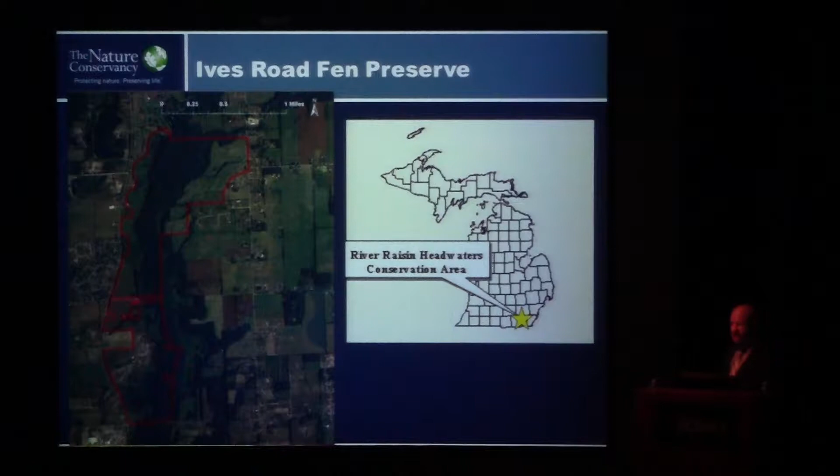You can see in this aerial photograph some of the threats in the surrounding landscape, including housing developments and agriculture. This green strip is really unique in this landscape because it's some of the remaining natural area. This particular preserve is about 700 acres in size, and about 100 acres of that is now prairie fen. I'll tell you how we got to restoring that prairie fen.

A little historical context about this property: in the 1940s there were major changes on the landscape that affected the disturbance regime—the disturbance processes that maintained the natural communities there. Those changes were fire suppression and altered hydrology. Prairie fens are fire-dependent habitats; they require regular fires for plant and animal survival and reproduction. Removing that drastically alters the nature of the ecosystem, and then there's also the altered hydrology.

A lot of this area was converted to agricultural use, and as a result, they put in ditches and drainage tiles to lower the water table, which drastically changed the communities. Those changes in the disturbance regime set the stage for the invasion of an invasive species called glossy buckthorn.

Are most of you familiar with the term invasive species? Okay, a lot of people nodding. So up in the corner here, you can see this is glossy buckthorn. It's a shrubby plant with very glossy, shiny leaves and these black berries, which birds love to eat and spread around the landscape. By the 1970s, what existed on this site is what we call a buckthorn monoculture, meaning vast expanses of the property were buckthorn and nothing else. There was no other species growing there, and I'll show you pictures of that, but it really diminishes the plant and animal diversity at the site.

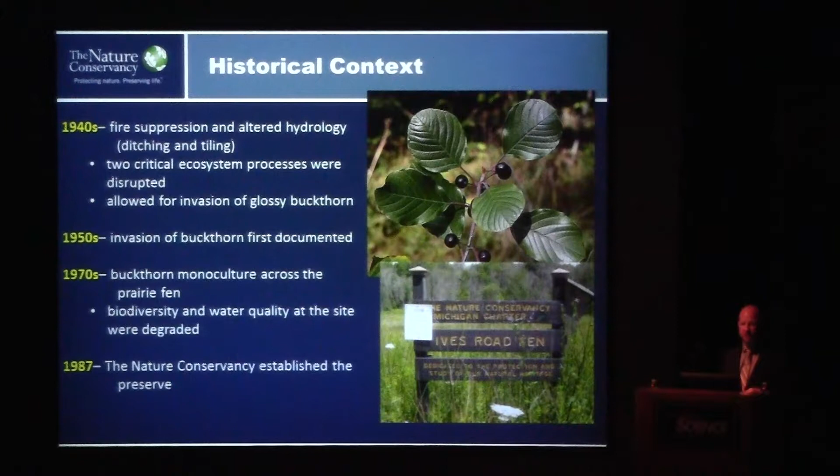Then in 1987, the Nature Conservancy purchased the property. You might ask, there's been all this abuse and degradation of the site—why would the Nature Conservancy buy this? The answer is that many of the native, rare and declining communities are in declining condition. There aren't any pristine fens left, so this was one of the best places left.

We saw the potential based on the plants and animals that sort of found some refuge in the few remaining pockets of fen. We saw the potential of the site, and that's why we decided to acquire it and start restoring the fen.

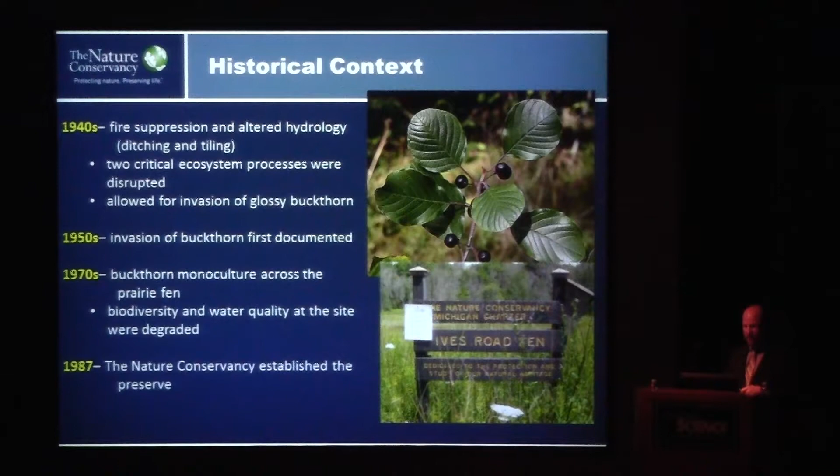For those of you who aren't familiar with invasive species, they're generally from another part of the country or another part of the world, introduced or finding their way to a new area by one means or another, much of the time by human activity. In the new environment, they don't have predators or competition from native plants familiar to their original area, so they tend to spread very fast, crowd out native species, and decline biodiversity. There's also about $120 billion a year spent on treating and monitoring invasive species around the U.S.

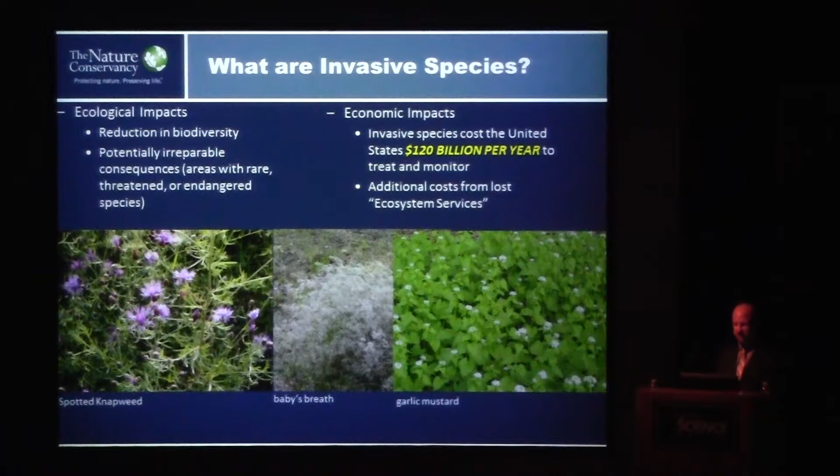Just to allay any concerns about using herbicides in the environment, the herbicides we use are wetland approved. They have very low impact on the environment and degrade very quickly, oftentimes just by being exposed to sunlight for a few hours, breaking down into very safe compounds. In addition, we're very judicious about applying them—we apply them to individual plants instead of spraying them over large areas.

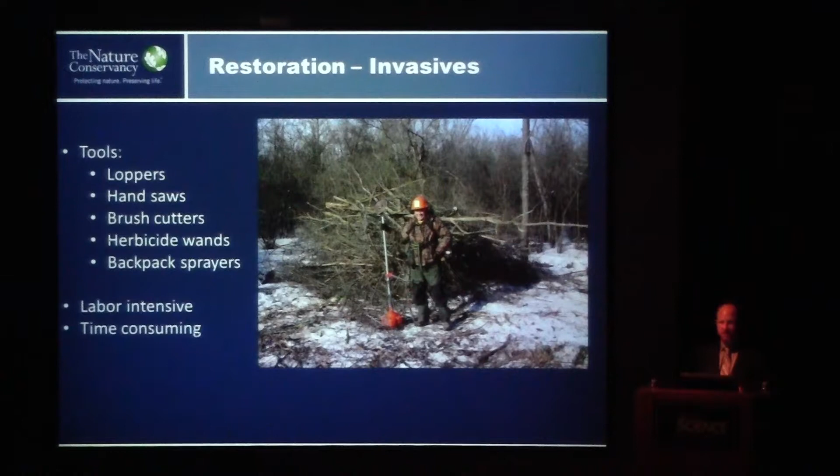I mentioned hydrologic restoration was the second technique we used. You can see in these diagrams how drainage tiles and ditches really change the hydrology of an area. Wetland plants like having their feet wet, having their roots in saturated soil. But putting in drainage tiles lowers the water table, which is great for agricultural crops but not good for native plant communities at all, especially wetland plant communities.

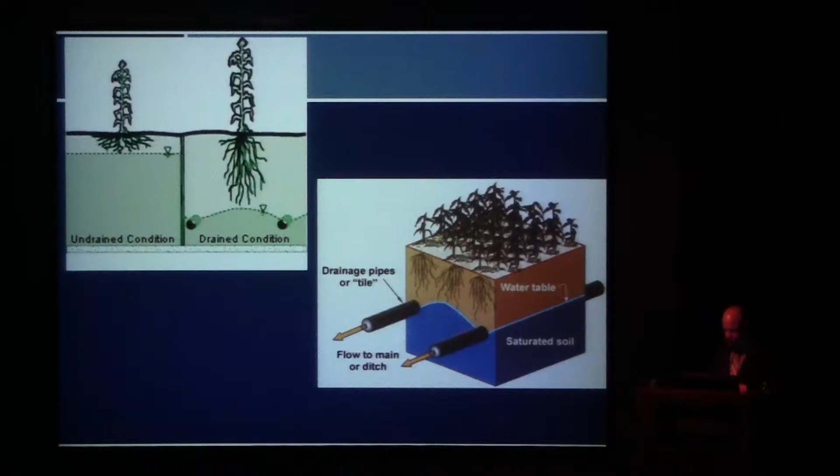So what we had to do is go through and remove these manually. In the 40s, drainage tiles were just short little sections of ceramic tubing, so we had to dig those out by hand. We couldn't use heavy equipment because the ground is too soft, especially when wet, and it would cause a lot of ground disturbance, so we had to do it all by hand.

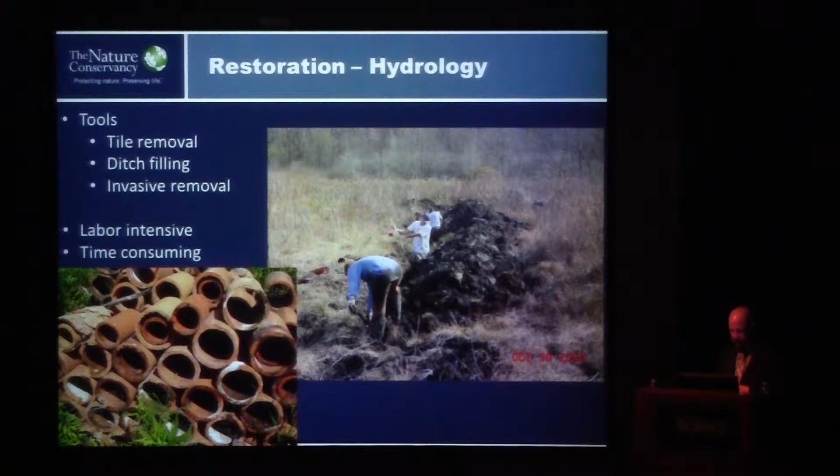When we removed these drainage tiles, we ran into a problem because we had these wide expanses of bare soil, and when it would rain or the water table came back up, it would start flowing down there and we'd get erosion problems. So we inserted tongue and groove board dams to break up the water flow and give the vegetation a chance to recover.

And then prescribed fire was a third technique we used. This is a fire-dependent community, and the plants and animals really depend on this disturbance process to be successful in survival and reproduction.

The seeds are just sitting in the seed bank waiting for the sun to get down to the ground level, heat them up, and provide the right conditions, and they spring right out. So we have a nice natural community. It saves us trouble—we don't have to buy seed and put it out there. They're really resilient communities if you just provide the right conditions for them. These plants just sprung back up in about 8 months or so.

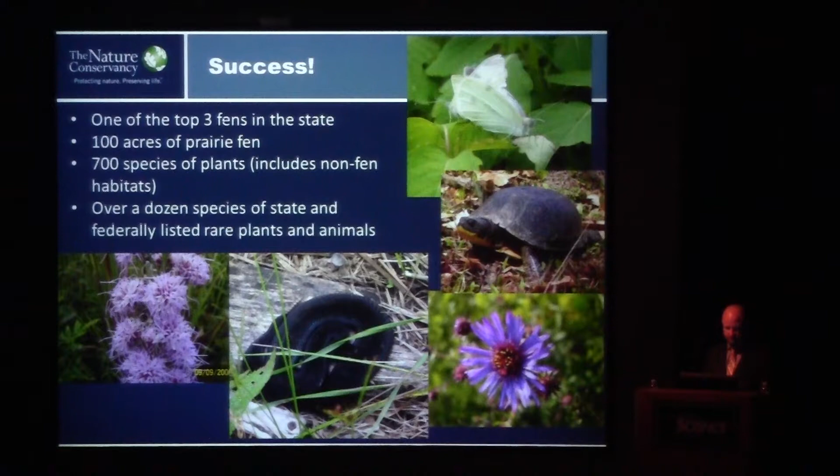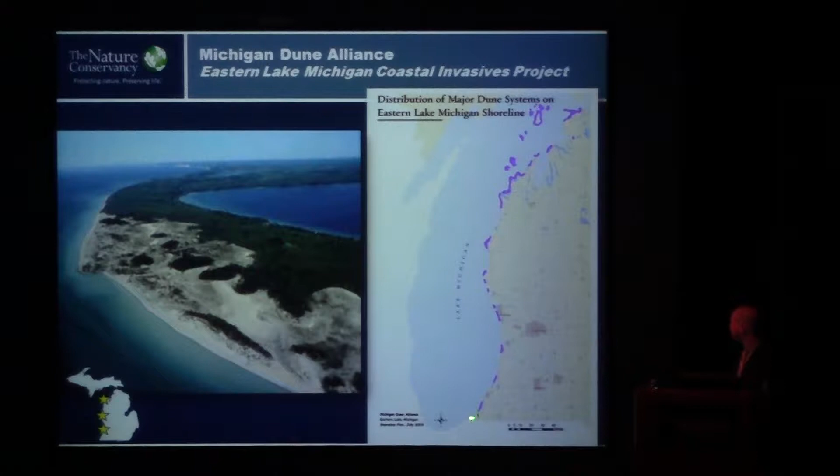So the next site, extreme makeover, that I want to describe to you is our Eastern Lake Michigan Coastal Invasives project. That occurs on the eastern shore of Lake Michigan, and it extends from the bridge all the way down to the Indiana state line.

So dune systems are globally rare and unique. The one in Michigan around the Great Lakes is the largest freshwater dune system in the world, so it's important to protect. It consists of several smaller communities like open dunes. You see here, there's some forested dunes that have been there a while. They've been there so long that they actually have full-grown trees on them. And then these small wetland pockets.

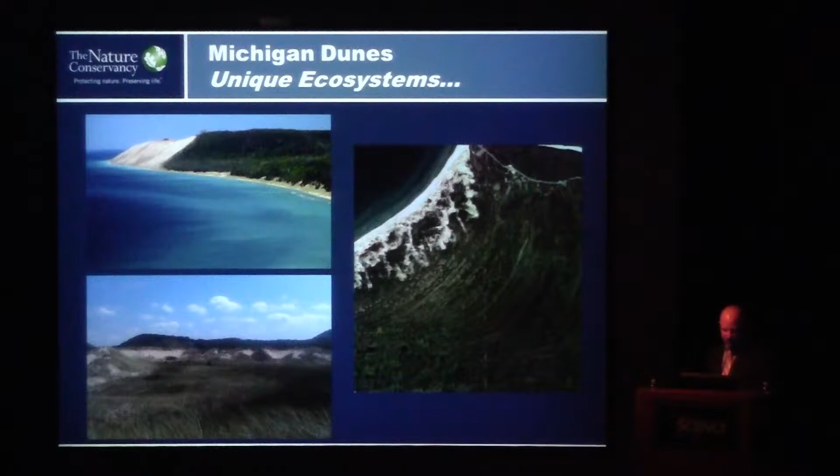You can see in this picture on the right, sort of striations or stripes - these are old shoreline edges, dunes, and then between the dunes you get little wetland pockets. So it's a very diverse mix of different communities there, and those communities support very unique species, many of which are endemic to the Great Lakes, meaning they don't occur anywhere else in the world except right here. Those include pitcher's thistle and piping plover.

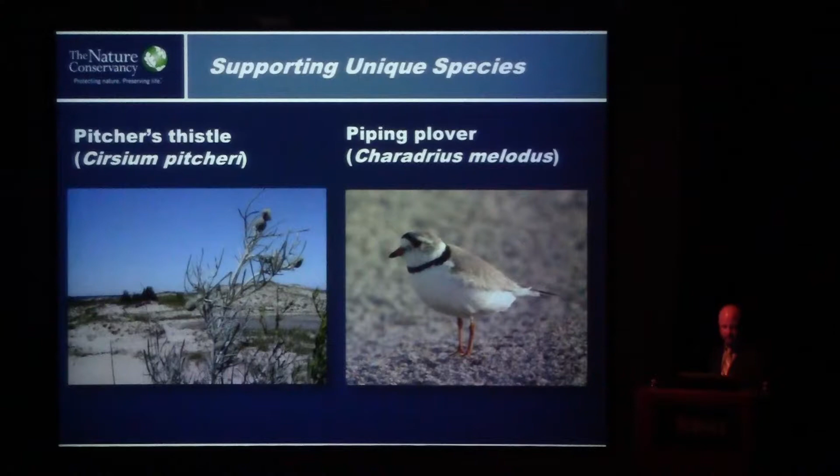So in 1999, the Michigan Dune Alliance was formed. It was a sort of consortium, a coalition of partners that came together and decided that the dunes and shoreline of this particular coast were particularly important to preserve. They focused originally on coordinating and building capacity amongst themselves, but around 2003 or so, the Nature Conservancy took a larger role, and we started focusing more on invasive species management because, based on a 2001 report, that was the primary threat to this particular coastline and the dune system.

So there was a survey of 42 different sites, cataloging the invasive species, to get a large-scale, high-elevation overview of the extent of the problem. Once we had that in hand, we could start coordinating with other partners and collaborating and planning attack.

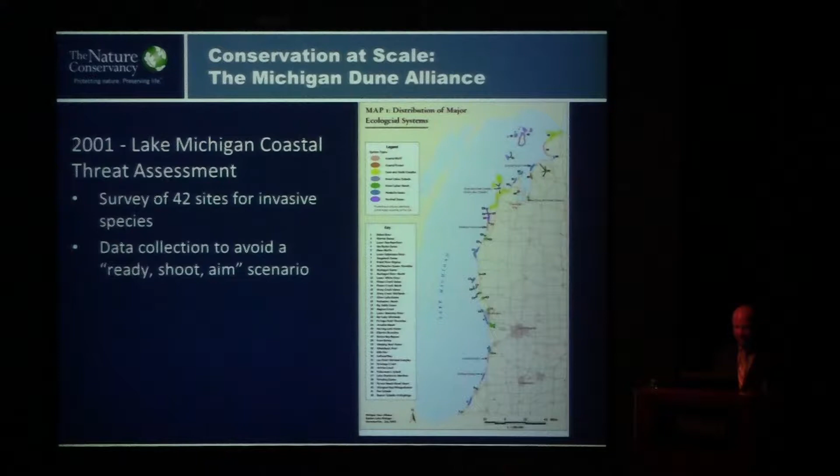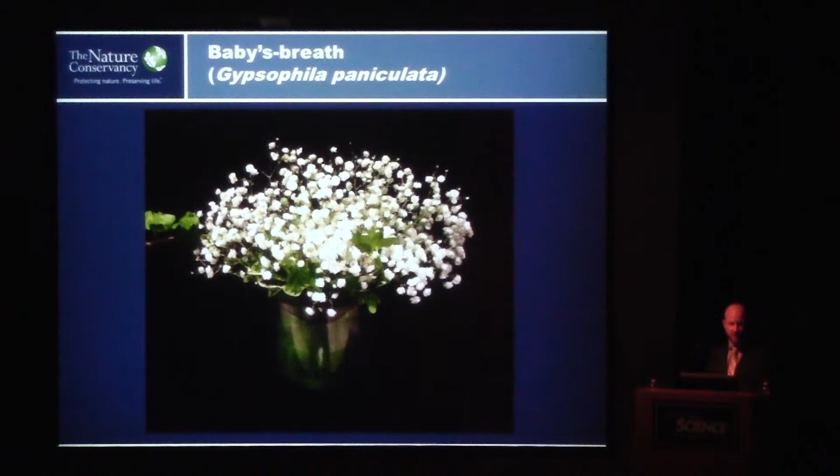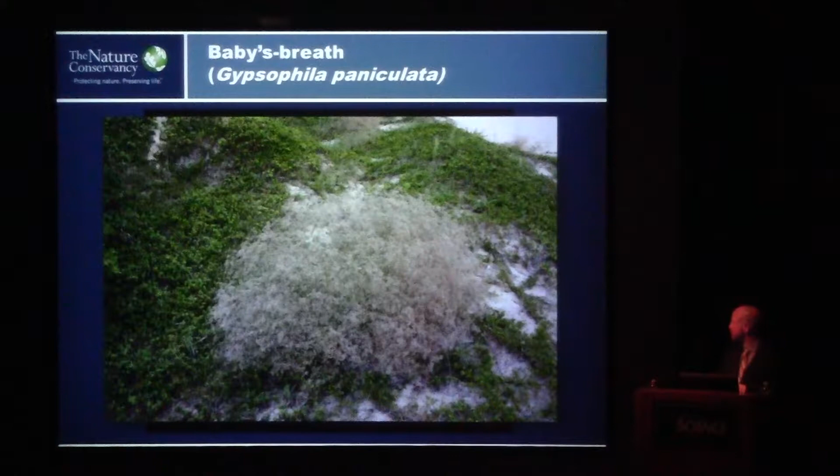One of the invasive species that was causing a major problem that we decided to work on was baby's breath. This is from Eastern Europe and Siberia. It was brought to the U.S. again as an ornamental and later used in flower arrangements, as you see here. But when it escapes cultivation or nursery areas, it can cause a big problem. It just starts spreading out. Plants are relatively large, and over time, they can cover vast fields.

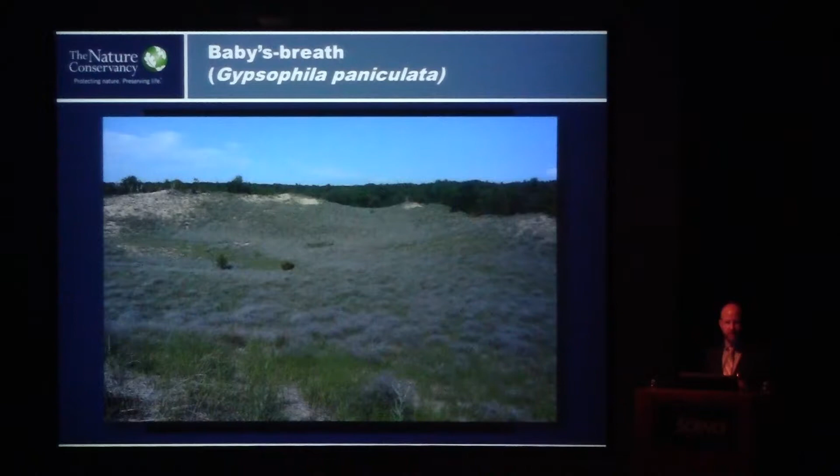And baby's breath is particularly bad for the dune system because dunes are naturally dynamic. The sand shifts from water and wind, and you can see that there's really not any area here for wind or any water to stir up the sand. So it really changes the entire ecosystem by stabilizing the dunes instead of having them naturally shifting.

Here's an example of an individual plant - you can see the ground would naturally be right here. This is all just a deep, thick taproot. So they're very well anchored, and like I said, they stabilize the dunes that way.

So we restore these areas using two means. One is what we would call a mechanical restoration, and that just means we use a tool to attack it. We would insert a shovel down below the ground and sever this taproot, because if you just go through and cut it right at the ground level, it'll grow back out again. So we needed to get underground to sever that. And then again, we also used herbicides in areas, especially if there were vast areas. We might use herbicide, but again, it's safe for the environment and breaks down very quickly.

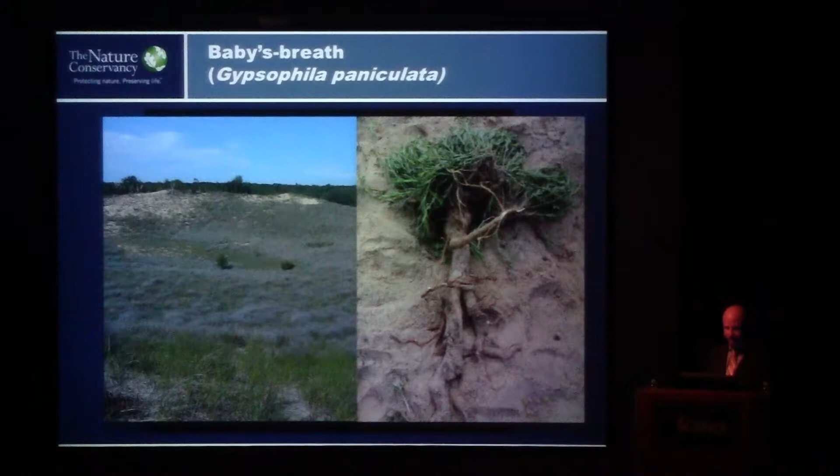So again, in 2006, when we started the project, you can see a big area of baby's breath here, and in the back you can see what it should look like. This is more natural back here. Lots of open space for the sand to move around, and that's what the local plants and animals are adapted to. That area either hasn't been invaded yet or we've already cleared it out.

So again, if everyone can join in, move that bus, then here's what it looks like. You can see much more open. One of the things that we saw after we did this work is pollinators, bees and other insects that actually pollinate local plants were much more abundant in these areas.

Now another component of this particular project is early detection, rapid response, and that just means we're on the lookout for new invasive species or common invasive species that are maybe at a very small size in a particular location. This is really the most efficient and effective way to address these restoration efforts related to invasive species, because if we can jump on them quick and take care of them before they spread across large fields or entire landscapes, then it's just much more time and energy efficient. Using the house analogy for the extreme makeover, this is equivalent to fixing a leaky pipe or making sure that you spray your house for pests just before the pipe breaks and floods your basement, and you're taking care of it up front. It's basically an ounce of prevention is worth a pound of cure.

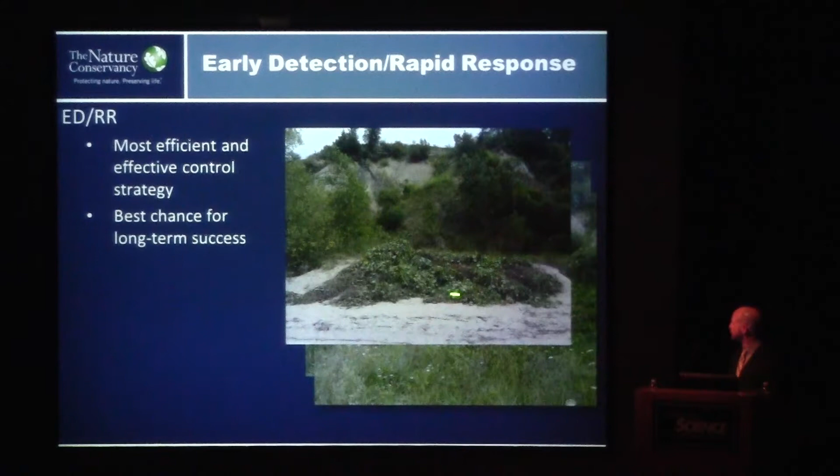So this is a kudzu patch. You can see we've started clearing it here. A lot of, and then cleared this whole hillside, was covered in kudzu, and we've ripped it all out and put it on the shoreline here where it can be hauled off.

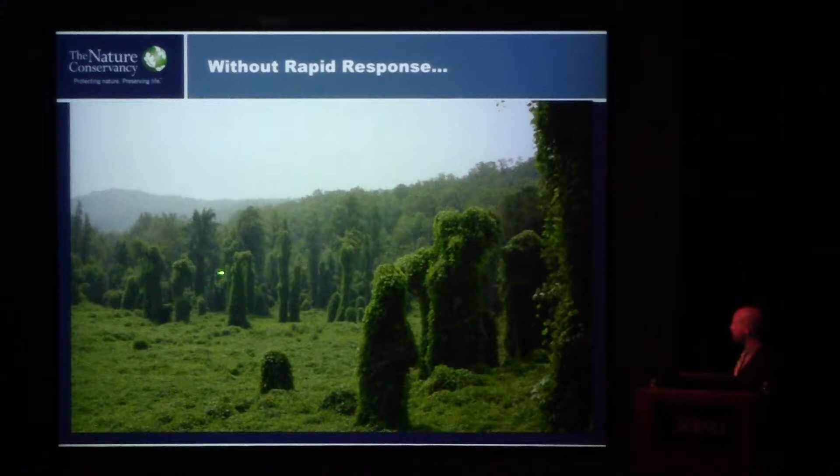So again, if you don't do early detection and rapid response, this is where you turn out. Kudzu, if you're not familiar with it, is known as the vine that ate the South. It covers enormous areas down in Georgia, Mississippi, Alabama, and these trees are dead because it just overshadows them, the same way that buckthorn shades out the plants on the ground. This kudzu will just grow up and completely block any light from getting to tree leaves, and so it kills these trees and just moves across the landscape.

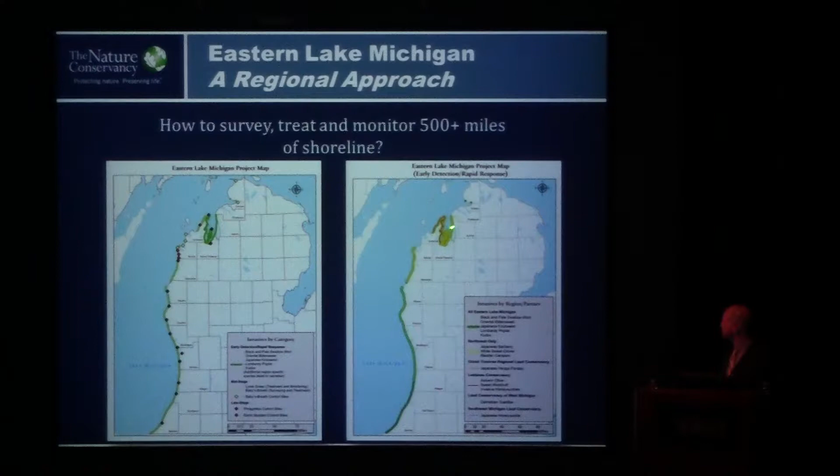As I mentioned before, this is really more of a regional approach. There was a widespread survey done of invasive species across this whole shoreline, and we really wanted to match the invasive species up with the different partners and where those partners' service areas were, where they had staff working. By doing that, we can be much more efficient with assigning resources, sending people out to certain areas that are nearby their offices. So we've mapped out the invasives and where each partner has easy access or they have land, and by using this, we've effectively coordinated invasive species monitoring along 500 miles of shoreline.

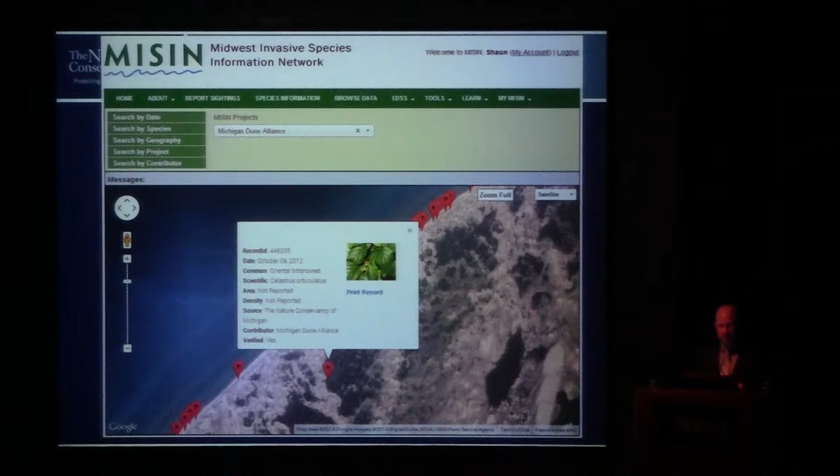We also use an online database using technology and GPS to track this problem. So here you see an individual dot, a problem. Each one of these little pinpoints represents an invasive species infestation of one sort or another. There's information on when the data was collected, what kind of invasive species was there, maybe whose property it's on, how big the patch is. By using this information, we can more effectively coordinate our removal efforts.

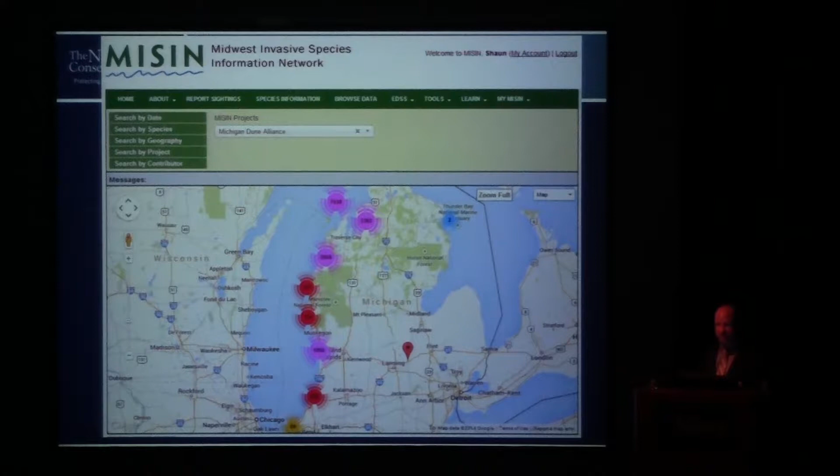Pulling back and looking at a larger scale, you can see these symbols represent how many of those smaller points are represented by each one of these. So the purple, lavender ones, are thousands of smaller points of invasives that need to be addressed. The reds are hundreds, and some yellows are just in the tens. That helps us prioritize where we do our work.

The success outcomes of this project to date: over 36,000 acres of public and private lands have been surveyed for 15 high priority invasive species, and in many cases we've reduced those populations by up to 75% through the work of the Nature Conservancy and coordinating with our partners. Also addressing, as I showed, the kudzu, lyme grass, phragmites, and over half of the dune systems that were infested with baby's breath have received treatments.

This project is in its 8th year, and we figure there's probably a couple years left to finish up the work that we want to do. It's been about $3.2 million so far, and there's maybe another $1 million worth of work to do in this landscape to get it to the point where it's at what we call a maintenance level, which means relatively low labor and time cost just to send someone out to check the areas we've already cleared and make sure there aren't any new developing problems.

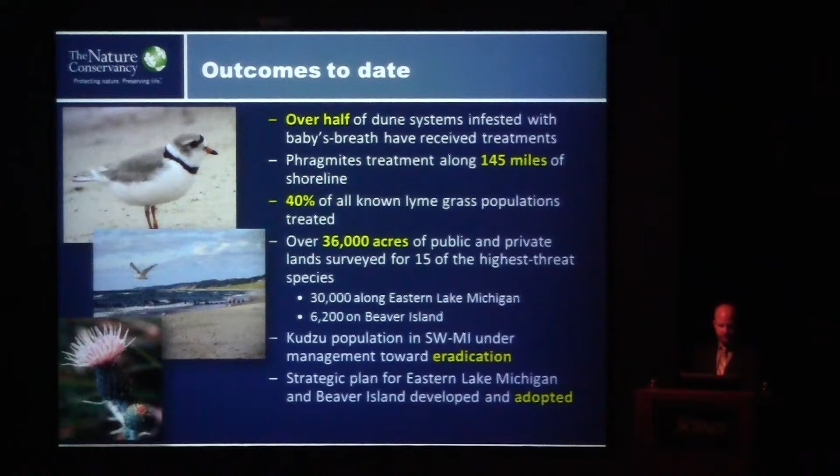The third extreme makeover is our Two-Hearted Watershed connectivity project. The Two-Hearted River is up in the Upper Peninsula, and it's one of the only free-flowing river systems in the Great Lakes. That just means there aren't any existing dams or impoundments along it. It's also the only river designated as a wilderness river by the state of Michigan.

But despite having very few impoundments and being in relatively good condition, it does have some problems, including sedimentation and connectivity, which basically means fish being able to swim all the way up to the headwaters from the mouth, passing all sections of the river and having access to that area.

These problems, sedimentation and lack of connectivity, are caused primarily by road stream crossings. Those are basically areas where roads cross the stream or river channel. There might be bridges there or culverts, or there might just be areas where people drive their four-wheelers and trucks across the stream with no formal bridge.

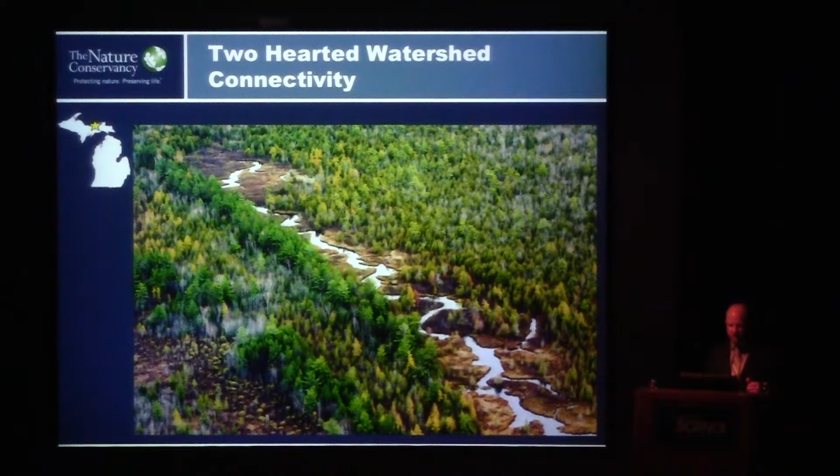In 2008, a survey was done to inventory all these areas, and then the Nature Conservancy built on that to inventory the entire watershed. You can see here we've mapped out where all the problems are.

These are all the road stream crossings within the watershed, and we've ranked them by whether they're a full barrier, meaning a fish would not be able to cross that point even during flood events in high water, or a partial barrier, where fish might be able to cross during flood stage or high water, and then other crossings that aren't much of a barrier at all.

So we identified 36 total road stream crossings, and 19 of those we felt were important enough that they really needed to be addressed and restored.

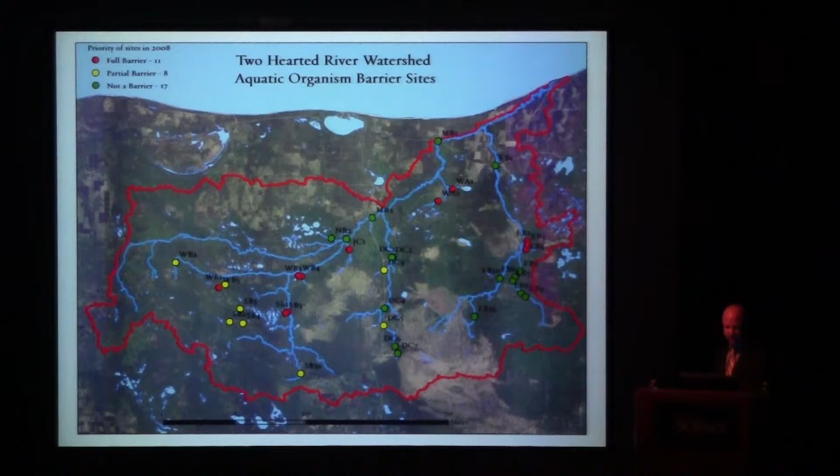In many of these areas, if the culverts are undersized, if they're not big enough for the amount of water flowing through them, you'll actually get water flowing through so fast that it erodes the area just outside the culvert. What that does is create what we call a perched culvert, meaning the culvert might be 1, 2, or 3 feet above the stream bed on the downstream side. That's a big problem for fish that want to swim up and gain access to the upper parts of the river—they can't jump up that high and swim to the other areas.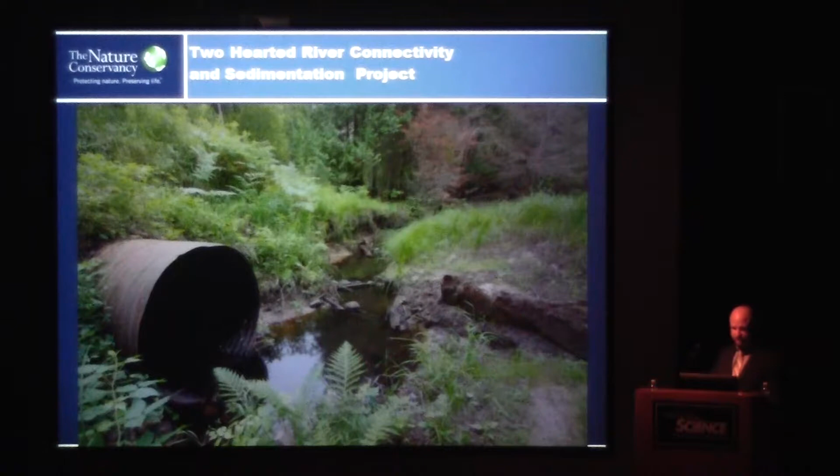Here's an example of one of the restoration sites. You can see the 3 culverts—they're different sizes, and it looks like they were put in at different times. When we get flood events, there's probably water actually flowing over this berm. So there's a lot of problems with this particular site.

I think we have another bus here. Move that bus.

And so this is what it looks like afterwards. We've widened the channel and solved the erosion problem along the banks by putting rocks in, which basically acts as a barrier to the water flow. It's much more fish friendly, allowing them to swim up and down here, and trucks and other vehicles have easy access across it without having any detrimental effects.

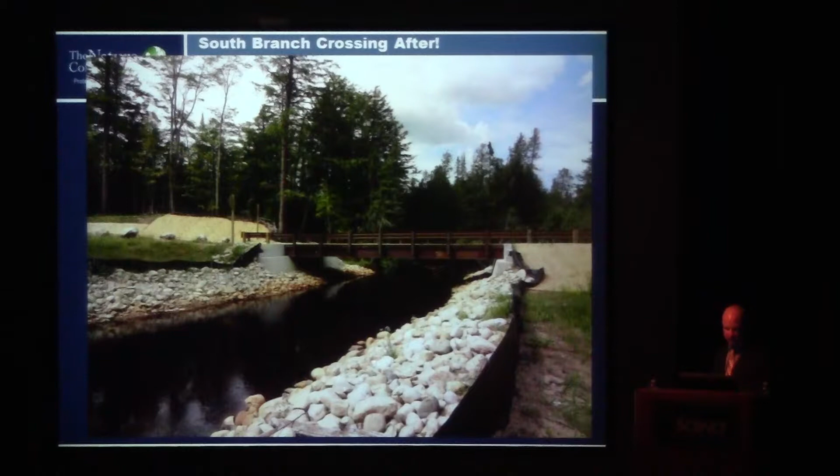And this shows a schematic, one of the engineering diagrams that we would use for this particular project. Just note down here at the bottom, these are the 3 culverts that were in there. They had a total passage area or opening of about 32 square feet. The area under the entire bridge that we put in was 244 square feet.

So it's almost a 7-time increase of the amount of area that the fish have available to swim through there, and we don't have problems with flooding events. The bridge is plenty high enough to allow lots of water to flow through there when the water is high.

So we've replaced 11 of these problem 19 aquatic barriers, and we have funding in hand at this point through federal, public, and private dollars to address some of the remaining ones.

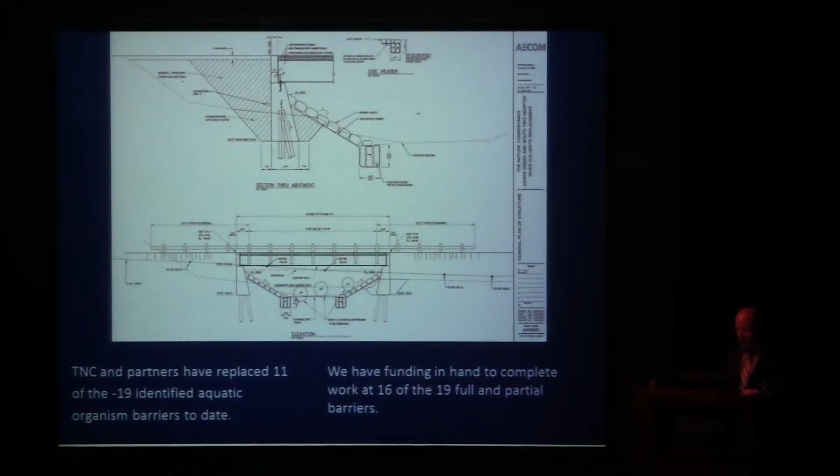Here's just another example of one of the road stream crossings that we restored before. It's just showing that it's relatively simple, cheap to fix these problems. Just a matter of putting your mind to it, inventorying them where they are, and finding some dollars to put towards them. Then afterwards, you can see a change.

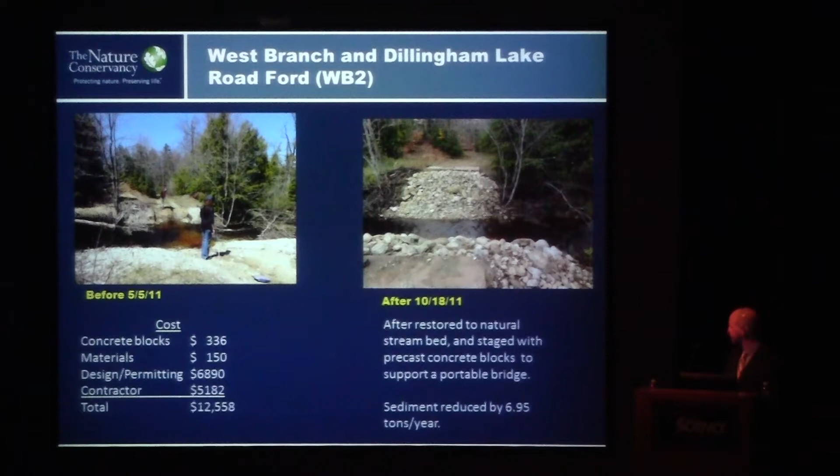Just note these concrete pads on each side. What we did with this particular project is we have a portable bridge, and so that can be moved up and down the road as need be.

So we have some sustainable forestry that we do along this road, and we can place this bridge in certain areas depending on whether there might be a harvest occurring, and when there's not some need to have road traffic there, we can remove it.

And by replacing something like this, we're reducing 98% of the sediment that was getting put into the stream.

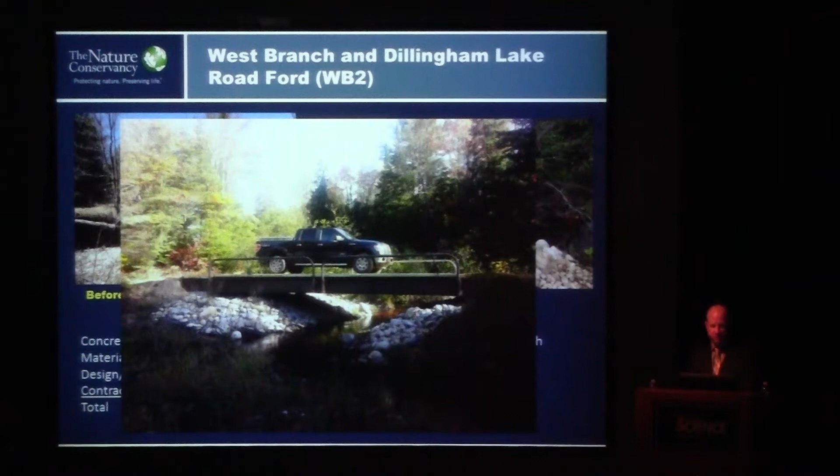So the benefits of this project: water quality protection and improvement through sediment reduction, the sediment that we're keeping from going into the stream. That's the equivalent of about 23 dump truck loads of sediment that was going into the stream that we've prevented.

So that improves water quality, it makes better fish habitat, and it keeps that sediment from going all the way out into Lake Superior. We've also improved the aquatic habitat and connectivity for fish.

So we've opened 35 miles of river that is now open for fish to use. It wasn't before. And then, as I mentioned, for the adjacent terrestrial habitat, we've done some grass and tree plantings to control the erosion in the adjacent shorelines.

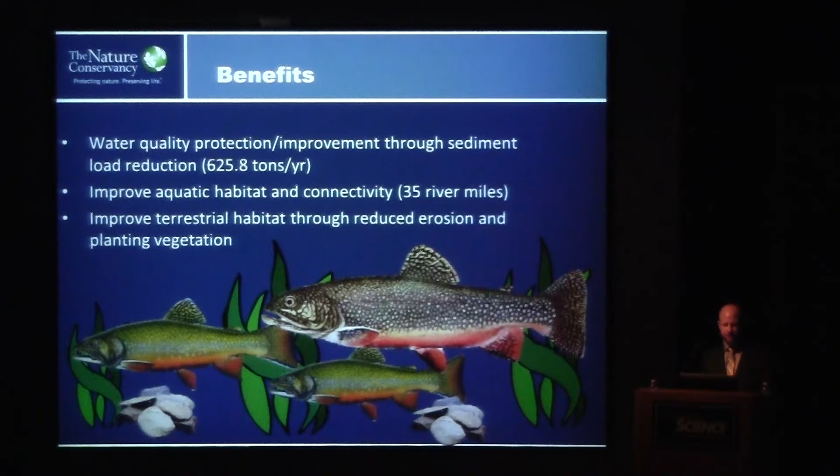And then the final project that I want to describe to you today is our Erie Marsh Coastal Restoration Project. This is in extreme southeast Michigan. This is an aerial view of the site. It's a diked wetland, which basically means it's a wetland with an earthen berm around it.

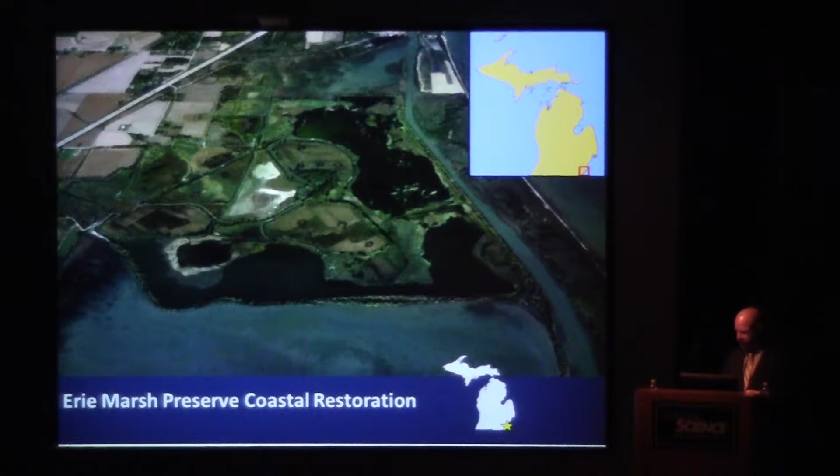The conservation need of this particular site: Western Lake Erie is one of the most productive and biologically diverse areas in the Great Lakes, just because there's shallow, warm water, which is good for productivity. But only about 5% of the original wetlands in this particular landscape remain. It's important for migratory waterfowl, shorebirds, and land birds, so it's imperative that we protect what remains.

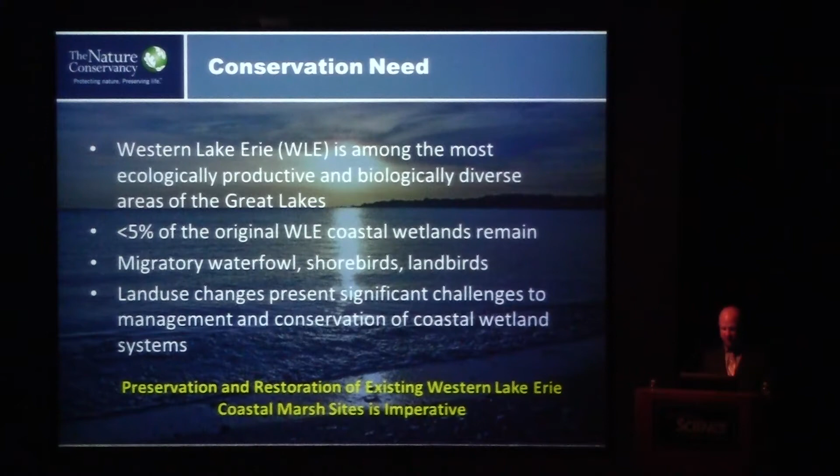And historically, to prevent these wetlands from being degraded, managers put dikes around wetland areas. Basically, that protected the area from lake level changes. If the water dropped too far, then all of the wetland plants would die. And then if the next year it came back up and was too high, it would just completely obliterate that site in terms of wetland quality.

So by putting a dike around it, we can prevent water from being too high in the high years, and keep water there even when it's too low in the lake in other years, so we can preserve the wetland communities in the face of changing water levels.

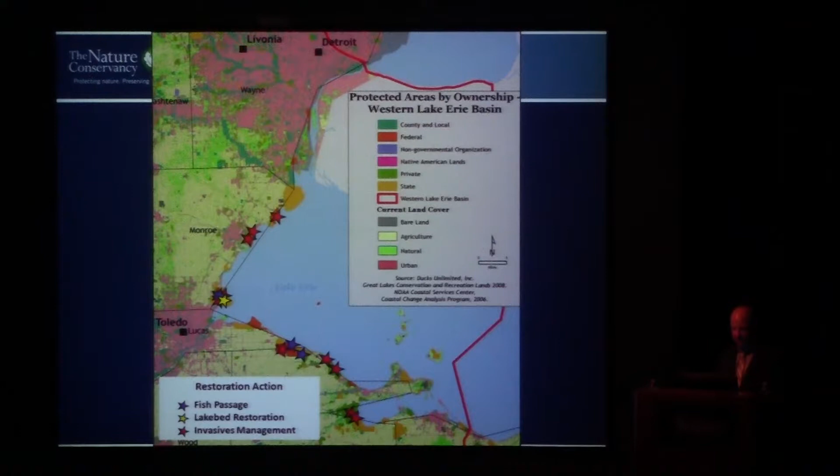Our objectives for this project: when we started, the diked wetland had been segregated from the open lake for 60 years, so no fish were able to get in there, and there wasn't a hydrologic connection. We wanted to reestablish that.

We also wanted to improve the quality and size of the wetlands within the diked area. So we wanted a mix of deep open water useful for fish, emergent marsh which waterfowl like, moist soil or mud flats for shorebirds, and some upland areas with lake plain prairie, which is a very rare plant community in upland areas.

We're also controlling invasive Phragmites at this site. And as I mentioned, providing some climate resilience, so in the face of changing water levels, we can maintain high quality wetlands right along the shoreline.

And also community outreach. There are about 6 or 7 million people in the metropolitan Detroit and Toledo areas. This particular preserve, Erie Marsh Preserve, is a big birding spot. There are areas for hiking, bird watching, and photography.

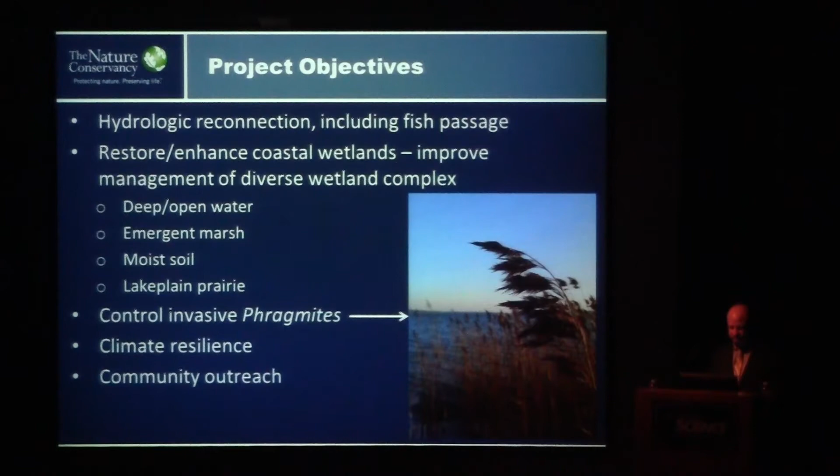It was established in 1870 by a private hunting club, and club members, when somebody joined, had to basically bring some land with them. They had to have an adjacent area, and so over time it grew to about 2,200 acres.

The wetlands were diked in the 1950s, and then in 1978 the Nature Conservancy bought it from the hunting club, and working with Detroit River International Wildlife Refuge and Ducks Unlimited, we came up with a restoration and management plan for the site.

I'll just mention that this site is sort of unique because it has a long history of wetland research and management.

It was a site used to demonstrate the detrimental effects of lead poisoning from lead shot on waterfowl. It's also used to demonstrate proper watering and dewatering of individual units for good management practices.

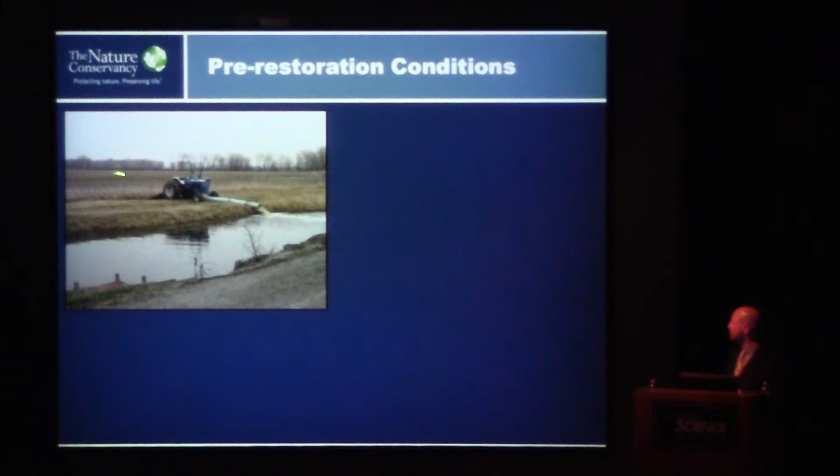So these are the conditions that existed when we started the project. This is how they used equipment, basically fossil fuel and electricity, to get water from one area to another within the diked wetland. These were what we call the water control structures, which controlled water moving from one site to another.

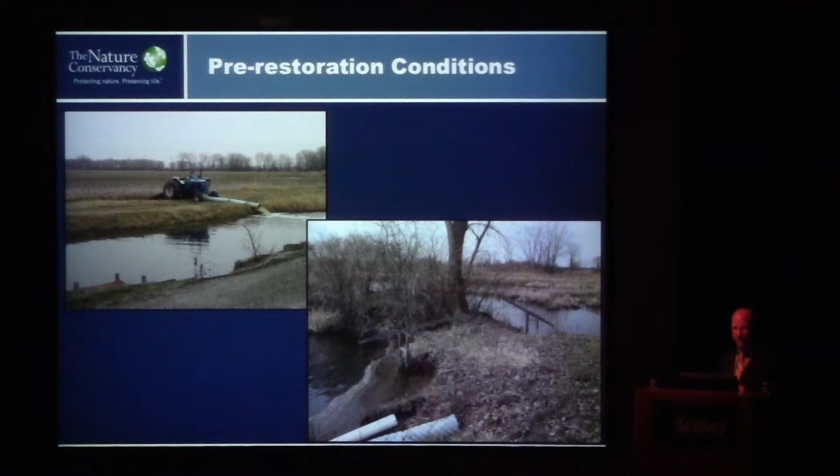This is just a piece of plywood down under the water here. These are rickety, outdated, prone to failing, and they leak even when they're not in bad shape. There's also erosion problems, either from the bad original construction or from muskrat activity in the area.

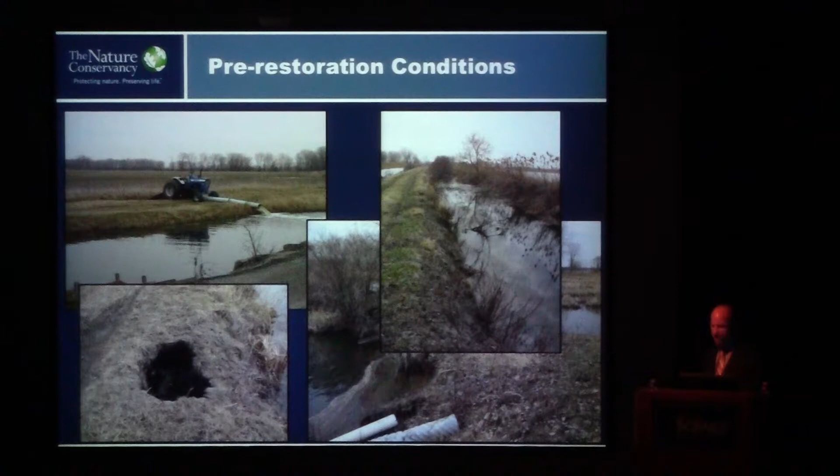The water distribution canals around the site were choked with invasive species, and the roads were very narrow, which limited access in some areas.

The existing pump structure, put in in the 70s, only pumps one way. Note this is the water level over here. It's actually pumping water up about 10 feet to get out of the wetland.

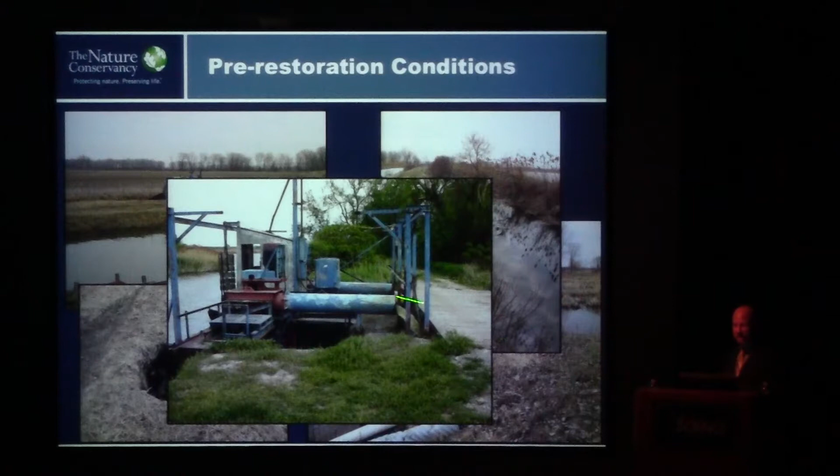So again, there's a lot of fossil fuel energy involved, and we wanted to make this a little more climate smart and easy on the environment. This pump only pumps out, so this site is blocked off from fish passage. Any fish out in the open bay and lake doesn't have access to this site.

So this is what the site looked like when we started the project. There are 6 management units, which basically means an area that has a dike around it, so it's an area we can control independently.

I mentioned invasive species. When we started this project, the entire site was about 1,000 acres, and 300 acres of that was monoculture Phragmites, so there was a huge Phragmites problem we wanted to control.

This one unit here, you can see how large it is. This is really a problem for wetland managers, because if we have 3 feet of water down here, up in the far corner it might be completely dry. In order to really manage for a particular wetland type, we need the capacity to flood each area more or less uniformly.

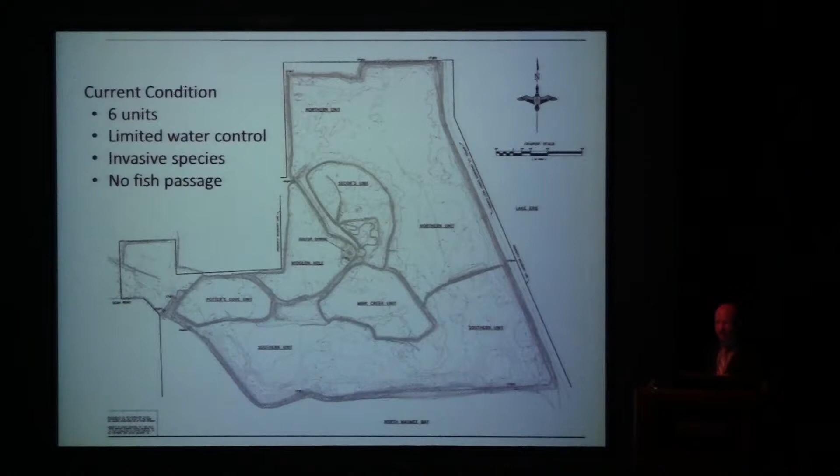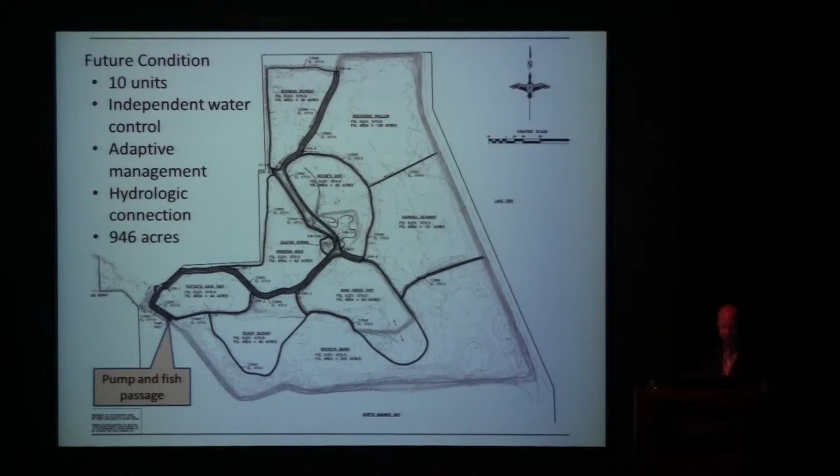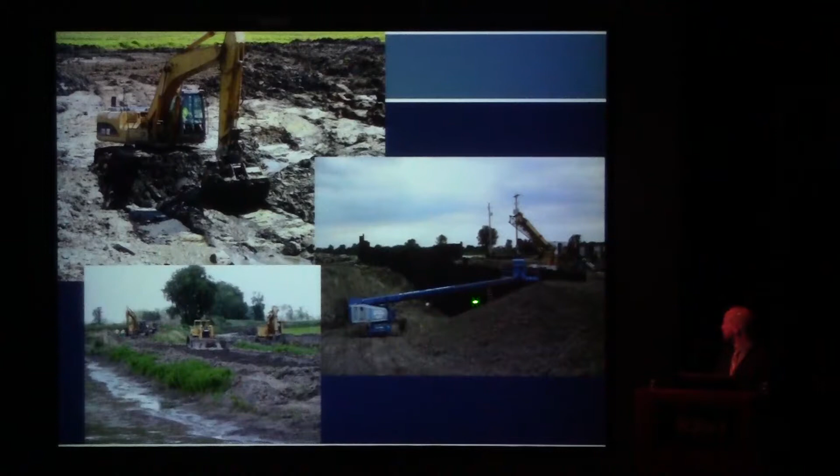This is a big construction project with lots of heavy equipment moving dirt, constructing the water distribution canal, and constructing the fish passage and pump structure here adjacent to the bay.

As I mentioned, Phragmites management involves three components. First is spraying with herbicide, usually by helicopter, because this is a monoculture of Phragmites. There's nothing else growing there, no native plants we're concerned about damaging with herbicide.

All the herbicide we put down hits Phragmites and kills it. Once it's dead, we remove the standing dead matter with something like this Marshmaster vehicle, which has a mowing deck, or we might burn it. The final and critical stage of Phragmites management is flooding those areas up to maybe 2 or 3 feet, which drowns out the roots. If any are still alive after herbicide application, they'll be dead after being flooded for a year or two.

So again, the before and after of this project.

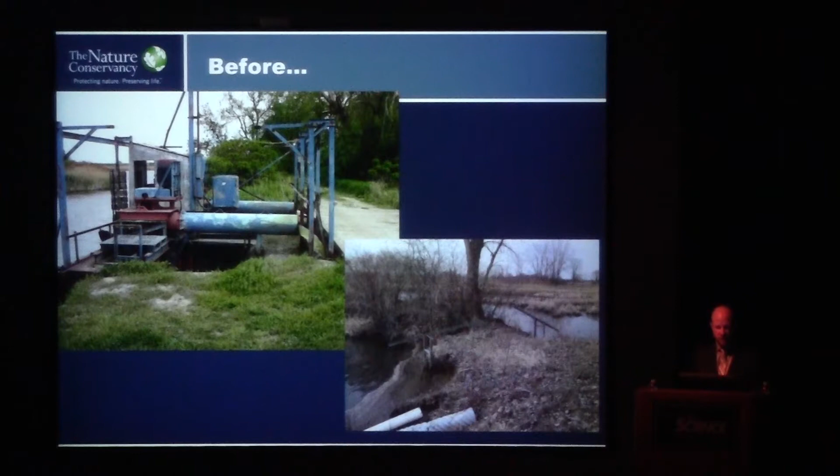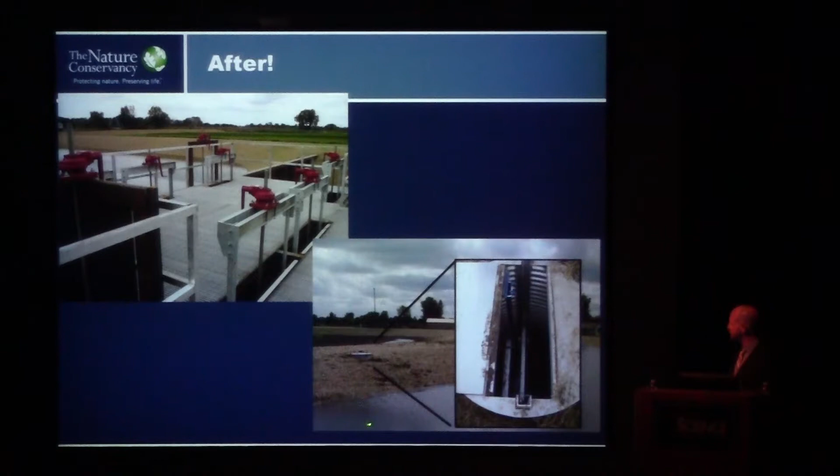This is what it looks like now: a new fish passage and pump structure. You can see we have individual controls for each gate, so we can more easily control the water as it's moving around the site. Instead of pumping water up and over the dikes, this is all gravity fed. This is a long tube that extends down to the bottom of the dike.

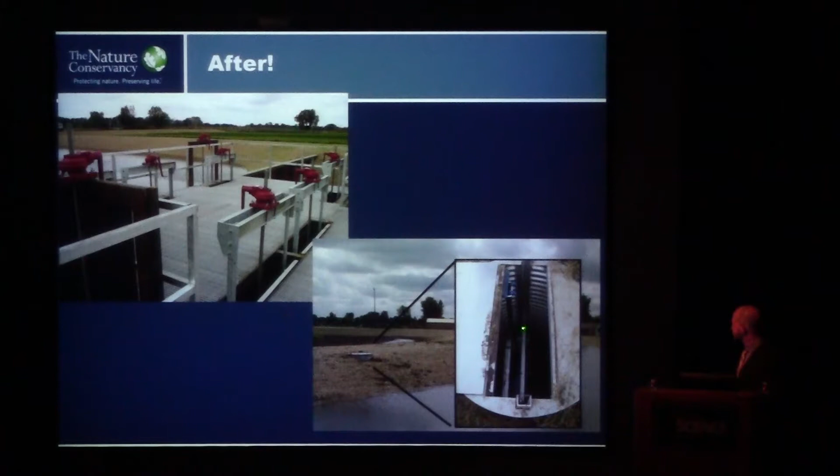There's a perpendicular tube, and we can control water level with what's called a bunch of stop logs—a series of metal boards that slide in one on top of the other. By removing one or several of them down to the depth we want, we can get water to flow from one side to the other and control the water level in individual units.

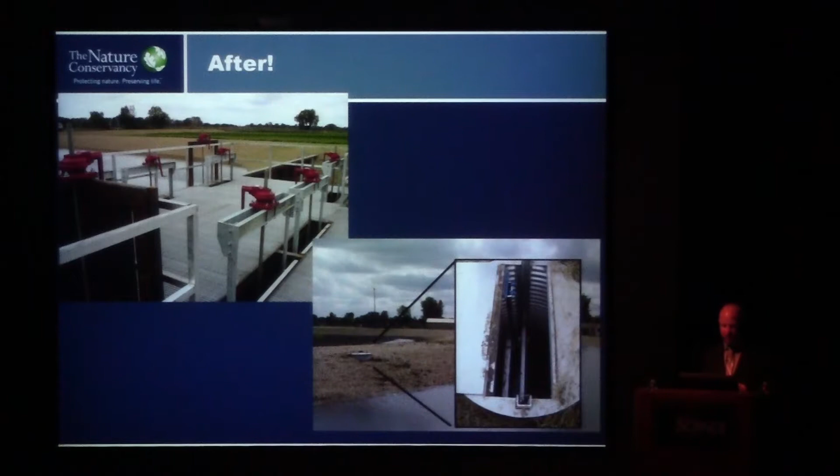I mentioned the gravity feeding and the new hydrologic connection, but also carp exclusion grates—you can see those right here. Basically what that does is keep invasive carp out of the area. When they get into a wetland, they tear up the submerged aquatic vegetation, stir up the water and mud on the bottom, and really lower the water quality of the site. So we wanted to keep them out.

Our native fish species are sort of narrow if you look at them straight on, but the carp are squashed—fat and wide—so they can't get through these grates, but the native fish can.

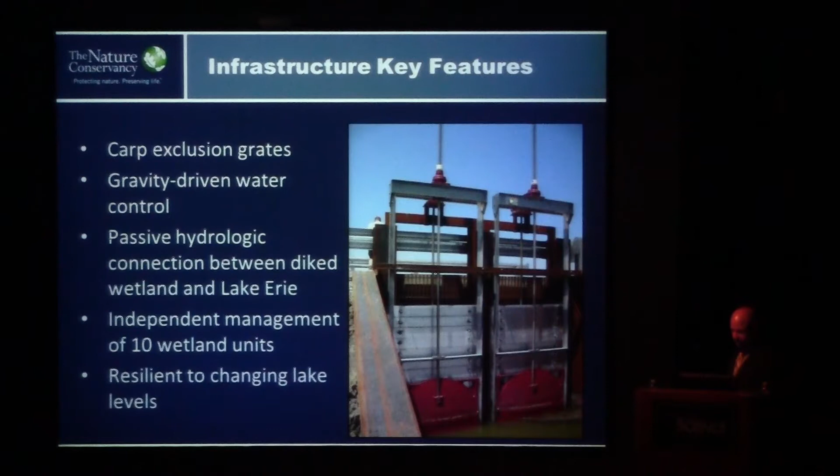Our work here is to actually demonstrate the benefits. We're monitoring fish, birds, plants, water quality, and also reptiles and amphibians.

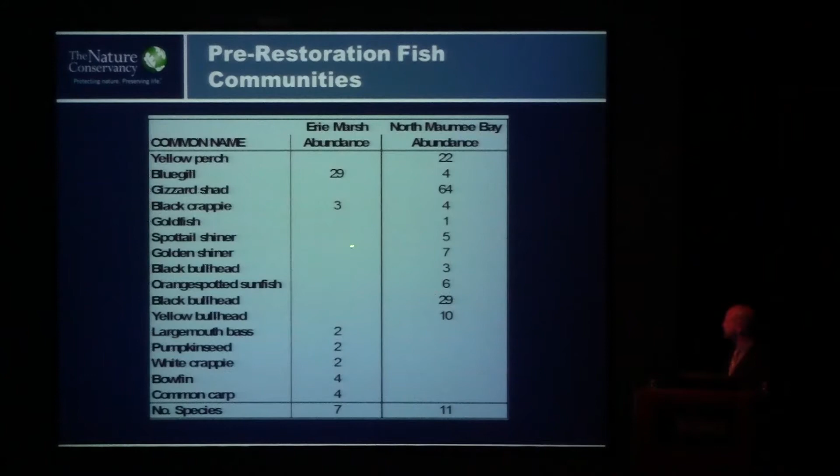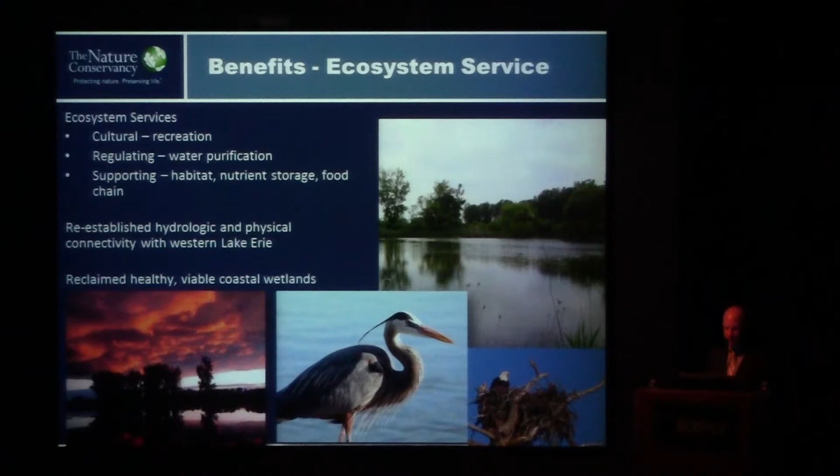So the benefits of this project include recreation—lots of birding and hiking at the site—and water purification and filtration capacity. These are ecosystem benefits, along with reestablishing the hydrologic connection between the diked wetland and the bay and lake outside. There are also species benefits for fish, waterfowl, shorebirds, native mussels, native plants, and listed species.

This project has a price tag of about $6 million. We have about $4 million for it and are still actively looking for the other two. We've been projecting it will take about 8 years to complete, so we're most of the way there at this point.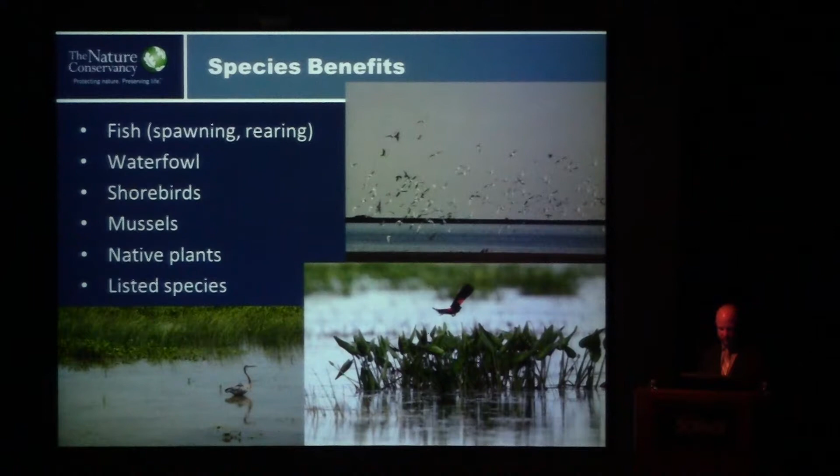I think with that, if you have any questions, I'm happy to answer them.

I have a question. I don't know where I read it, but very recently I read that there's major concern over the western part of Lake Erie, that the algae blooms are all coming back.

So the question was about the algae bloom problems in western Lake Erie. A lot of that has to do with agricultural uses farther up in the watershed, sediment problems and fertilizer runoff from agricultural fields getting into the lake and making it even more productive than it is naturally, which is bad because then you get all these algae blooms. That's something the Nature Conservancy and other agencies and partners are working on.